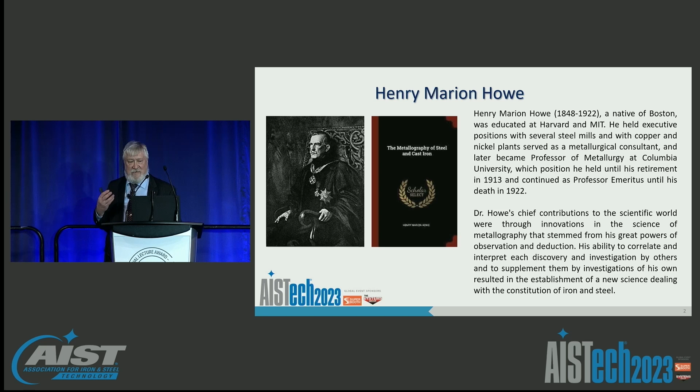Ron already highlighted some of the attributes of Henry Marion Howe, and I wanted to just emphasize those. One of the things that Henry Marion Howe did was actually take the art of metallurgy and transition it to a science. And he was very successful at doing that, publisher of one of the early metallographic texts in the industry. Overall, his impact over the years led to a large number of individuals who have continued that contribution.

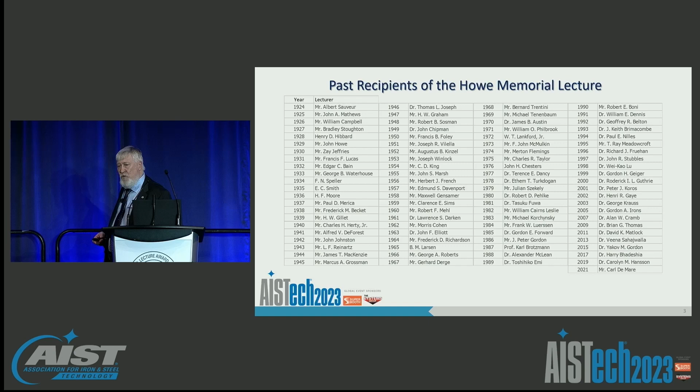Ron already showed a list, but I wanted to just put that list up here again. As I look through this list, there are so many people that I know from my time in the industry, so many people that I have great respect for that have helped me in my career. I just wanted to say thank you to all of them for laying the groundwork for the future of the steelmaking technology area.

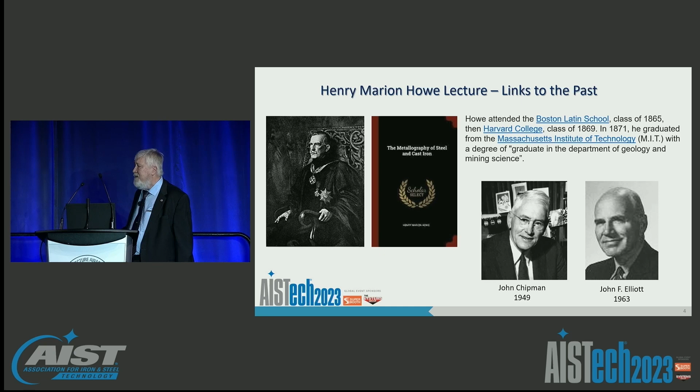I did want to highlight one area that I'm particularly proud of, and that is, as I look back at some of the past selections for the Howe Lecture, my advisor, John Elliott at MIT, was a previous speaker. And not only that, but his advisor before him was also a Howe Memorial Lecturer, and that's John Chipman. And as I go back and look further, Henry Marion Howe himself also was a graduate of MIT. So there's a long legacy for MIT's involvement in steelmaking, and I'm really proud to be here today to carry on that legacy.

So we're going to talk about fiber optics, but I want to basically first talk a little bit about Industry 4.0. You all know that Industry 4.0 refers to the fourth industrial revolution, which affects every manufacturing domain, not only steel, and advanced manufacturing technologies that capture, optimize, and deploy data. Boston Consulting Group identified 9 key areas that drive Industry 4.0 methodology: additive manufacturing, augmented reality, autonomous robots, big data analysis, cloud, cybersecurity, horizontal and vertical systems integration, Internet of Things, and simulation. All are components of this Industry 4.0 thrust.

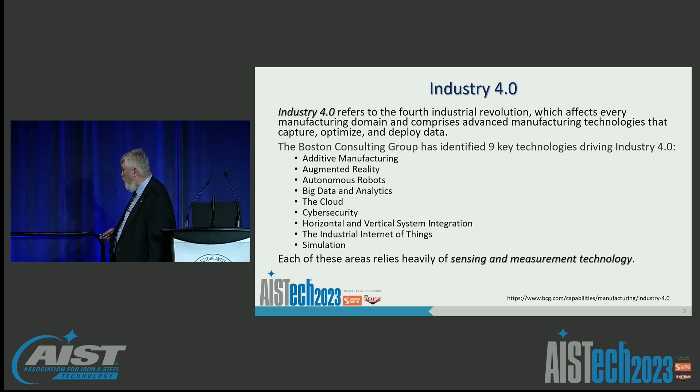One of the things that is important for all of these areas is that, for the steel industry, really all of these technologies rely on sensing and measurement technologies to actually enable Industry 4.0. And in particular, I'm really interested in it from the standpoint that we deal in an extreme environment. The temperatures and conditions within the steelmaking environment are tough environments to measure temperature, strain, position, composition, and so forth. However, the Industry 4.0 methodologies really require these inputs to support things like artificial intelligence, big data analytics, neural nets, Internet of Things, augmented reality, robotics, and digital twins. In order for these things to work, we need to be able to measure and verify these systems, and it's key to continue the push to develop new sensor technologies.

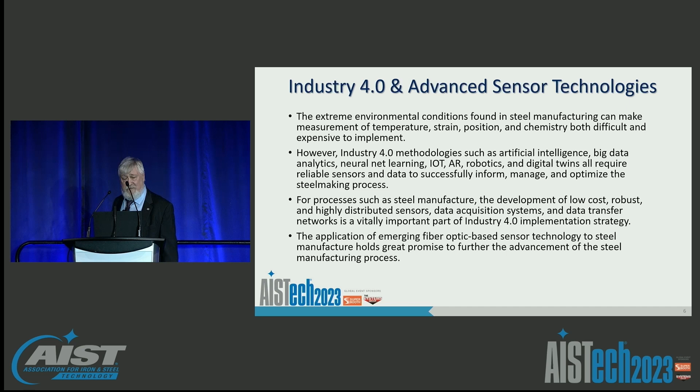From my standpoint, one of the big interesting areas in steel measurements is the application of emerging fiber optic sensor technologies. Steel manufacturing is a key area where we can apply some of these new technologies. So what are fiber optics? Simply put, they are light pipes. They actually transmit light energy through the core of a fiber with low attenuation so that you can actually send this signal from one location to another.

Those systems can also be configured to measure things like temperature, strain, and even chemistry. Those measurements are really important to our industry. Fiber optics actually provides a really interesting methodology to do these measurements in the hostile steelmaking environment.

Some of the advantages of these fiber optic systems are that they're small and lightweight, immune to electromagnetic interference, and resistant to chemical corrosion. They have, in many cases, high temperature capabilities and very high sensitivity. They provide the ability to do remote sensing with interrogation units away from the high temperature environment. And finally, they provide a unique opportunity to do distributed sensing, where many measurements can be made along one fiber.

Fiber optic sensors come in a whole variety of forms, and I want to highlight some of these fiber types and some of the sensing methods used in them. Fiber types typically consist of either single mode or multi-mode fiber.

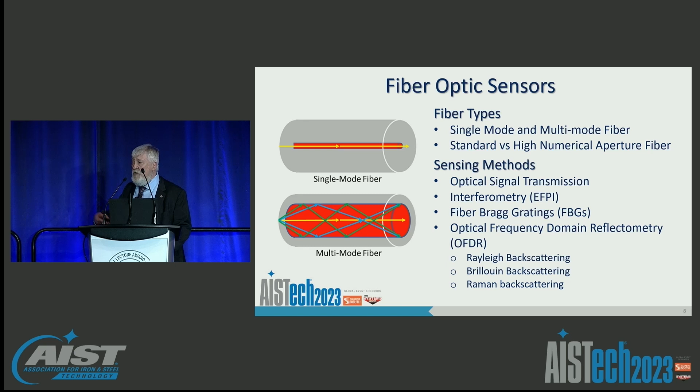There are various types of scattering that can be measured in the optical frequency domain: Rayleigh scattering, which has the highest resolution; Brillouin scattering, which has a lower resolution but much longer transmission length; and Raman, which is almost equivalent to Brillouin in terms of its extended lengths. I'm going to be talking more about all of these.

To start off, one of the simplest forms of sensors that can be manufactured with a fiber is an interferometer. An interferometer looks at reflected light off the end of the fiber and reflected light off of a target, collects those reflections, and monitors the behavior or distance between the target and the end of the fiber based on its interferometry signal.

Those two signals create an interference pattern. That interference pattern is directly related to the gap between the end of the fiber and the target, and the index of refraction of the medium in that region.

It turns out for things like temperature measurement or space measurement, these types of sensors can be used for very accurate position measurements, in many cases under conditions where they're exceptionally insensitive to temperature. I'll show you some examples of that later.

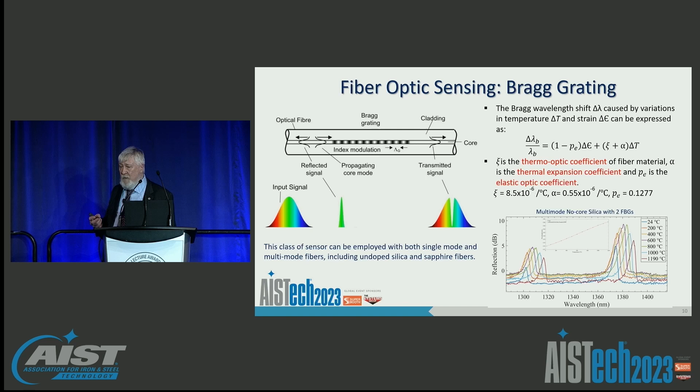When the conditions at that location on the fiber change, that pattern remains but shifts in its frequency. We can use cross-correlation methods to interrogate about a 0.5 millimeter space along the length of the fiber, and that leads to essentially a near continuous temperature measurement.

It turns out there are some really interesting ways to do that. You can either isolate the fiber from strain and measure temperature, or fully connect the fiber and measure a combination of temperature and strain. But we can also use different fiber numerical apertures in the same configuration and deconvolute the temperature and strain signals directly, by comparing signals of two different fibers with different numerical apertures. So a 2-fiber run can actually do a deconvoluted temperature and strain measurement, which is pretty exciting.

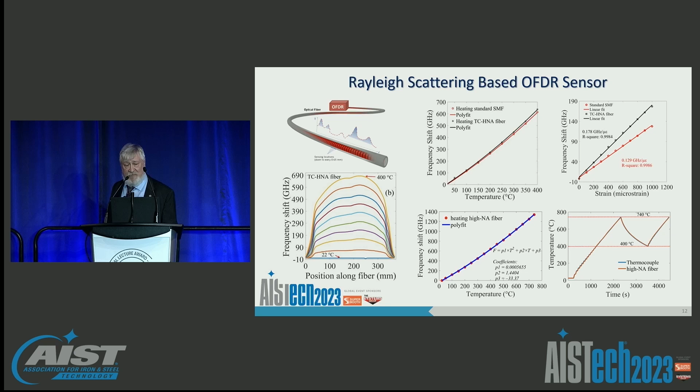If you look at the bottom right, there's a plot going up and down in temperature, with a thermocouple superimposed on it. You can get an idea of how accurately these things trace and predict the temperatures based on their frequency shift. But that comparison is a little deceiving, because you also get the information on the bottom left.

Which is the full temperature distribution along the length of the fiber. So running one fiber through your furnace or in an environment will actually give you the whole profile. And that's really exciting stuff.

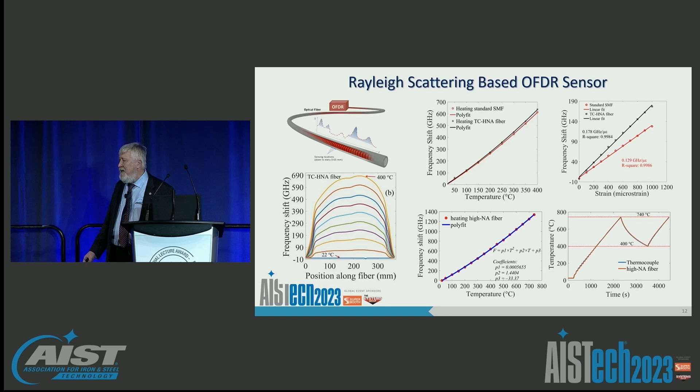There are a number of different methods I've already highlighted, and I wanted to summarize some of them here, because each has its own distinct advantages and disadvantages. If I look at fiber Bragg gratings, typically the maximum spatial resolution you can get out of those fiber systems with Bragg gratings etched on them is about 5 millimeters, which is great for a lot of applications and actually being used in continuous casting molds today.

They can sense, though, at very long distances, up to 10 kilometers in length. But their one restriction is that typically you're limited to the number of sensors you can put on the fiber, because each one has to have a distinct frequency. So typically we can have maybe up to 128.

Many systems that I see out there are limited to 50 or 60 sensors on a fiber. But with that, you can go over very long distances and do point temperature measurements. So it's kind of a quasi-distributed measurement system.

Temperature or strain can also be measured. The other thing about Bragg gratings is that they can be used not only in single mode, but also in multi-mode fibers, where the core is so thick that you have multiple light paths, and you can no longer use time of flight for position measurement. The frequency defines the position based on the frequency you set along the fiber.

These fibers can actually reach temperatures up to 1800 C if you use certain fiber types, like single crystal sapphire fibers, which can now be grown in up to 2-meter lengths. So I'll show you some examples of that as well.

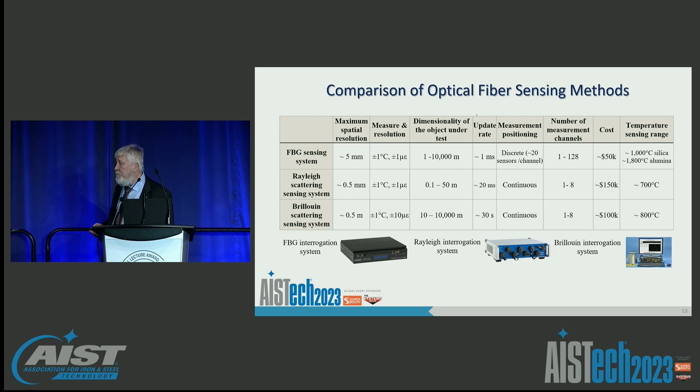So I want to now just talk a little bit about how we use some of these fibers. And today, some of these fiber systems are already being introduced into the industry for a lot of uses.

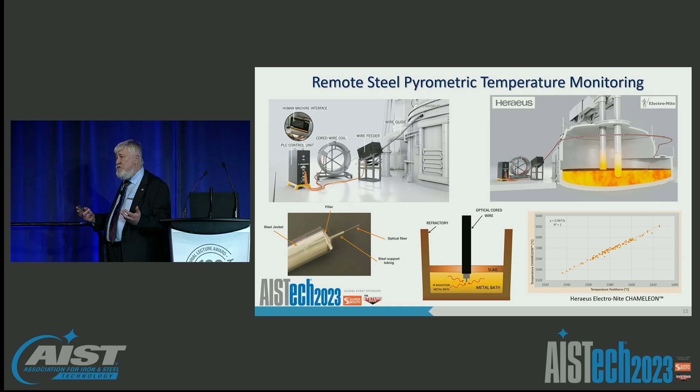Just to give you a few examples, here's a system called the Chameleon system by Heraeus Electro-Nite. It is actually a consumable fiber that is injected into the steelmaking environment, the EAF or LMF environment. The fiber is consumable, it's protected and jacketed, and it actually measures the thermal emission and carries it back through the fiber to measure, essentially through an optical pyrometry method, the temperature at the tip of the fiber being introduced and ultimately consumed. The beauty of this method is that the tip of that fiber actually acts as a black body radiator, and so emissivity corrections aren't required, so you can get a very accurate temperature measurement.

There are some other advantages of this system: because the fiber is being introduced and consumed, we can also do things like track interfaces, such as slag and metal bath heights in these systems. And we're working actually with Heraeus on some other ideas to incorporate composition measurement in these kinds of systems as well.

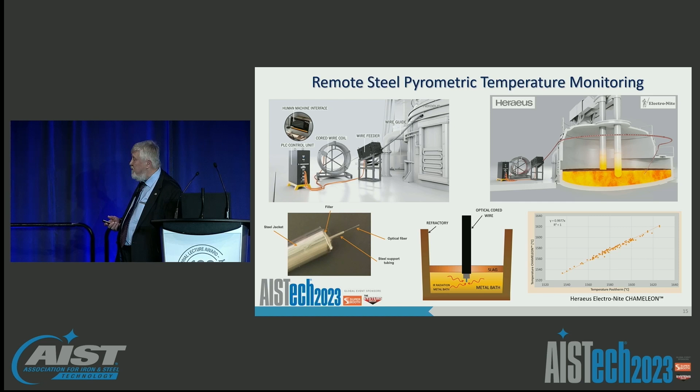There are a number of people that are marketing sensor systems to go into the refractory linings of your steelmaking vessels. There's a couple of them that are out there that have largely settled on the use of either Brillouin or Raman backscattering, which, as you remember, is relatively low resolution, about a half a meter measurement length accuracy.

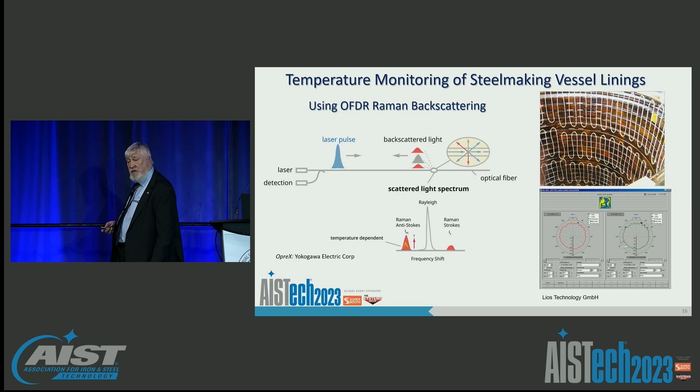One of the biggest areas we're seeing an influx of fiber optics is in the continuous casting process for measurements of mold thermal behavior. The standard right now for these technologies are based generally on fiber optic sensing methods using Bragg gratings. These Bragg grating methods, as I mentioned, can measure resolutions down to about 5 millimeters and can map the thermal behavior in a mold over a wide area.

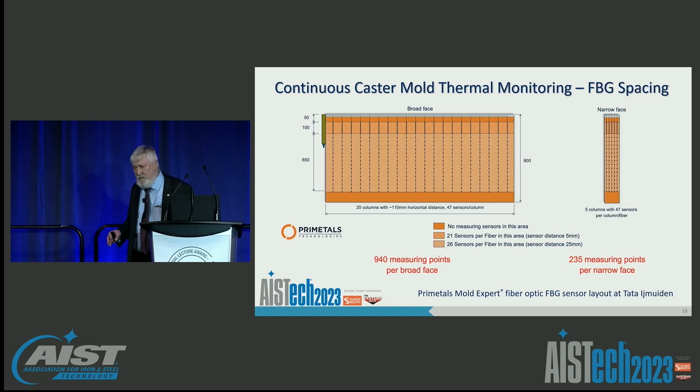There are others out there, and this happens to be one of the higher resolution ones I've seen. Here, each shaded area is an individual fiber, and each fiber has between 21 and 26 sensors etched on it. They've mapped a much higher density around the mold meniscus area, and the advantage of doing that is we can now thermally trace the meniscus and the meniscus shape. Here are some examples of that.

Here we can actually see standing waves, flow asymmetries, sticker events for sticker detection, and you can track and monitor that wave shape in real time. One of the things we always worry about in the casting process, to make quality steel, is we have to minimize the wave asymmetry and turbulence in the mold. So this is a really valuable tool to tell what your mold profile is looking like.

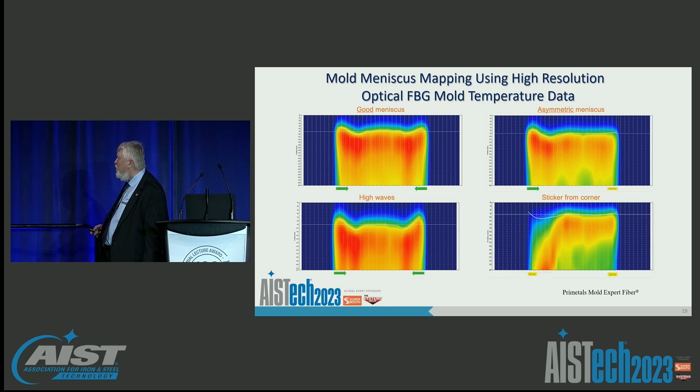Before this, the way we used to measure these systems is we would put nail boards or shims in the mold and do a spot test, right? But now with these systems, it's becoming increasingly more valuable to actually see these things dynamically.

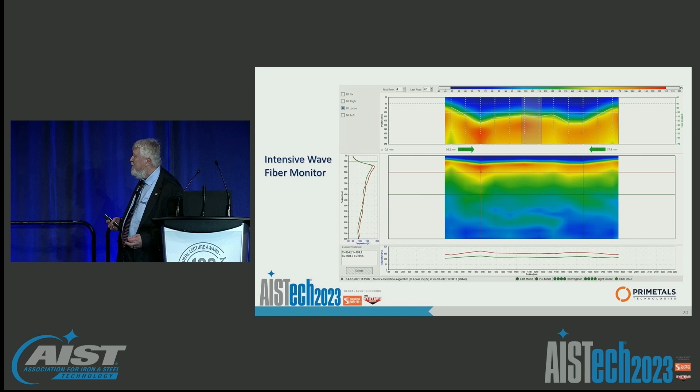Here's an example of some dynamics in the casting process. You can see how that meniscus behavior is fluctuating, and you can see the thermal profile lower in the mold down below as well. There are some things about the lower region of the mold we'll talk about in a minute. But all in all, these are great tools for studying the stability of flow in certain submerged entry nozzle designs, the efficient use of electromagnetic braking, and also the development of mold fluxes.

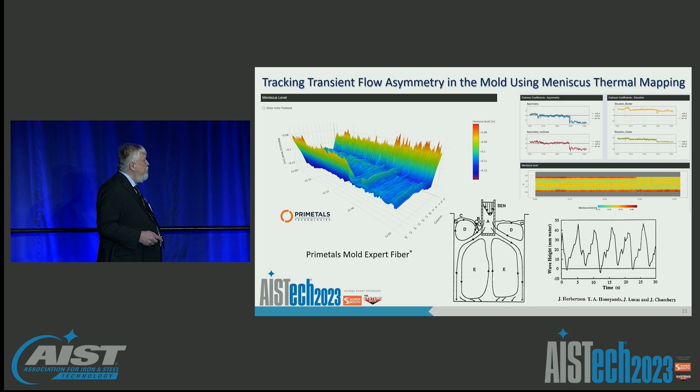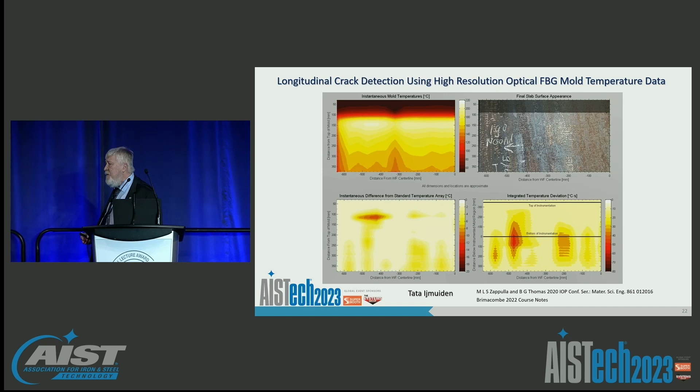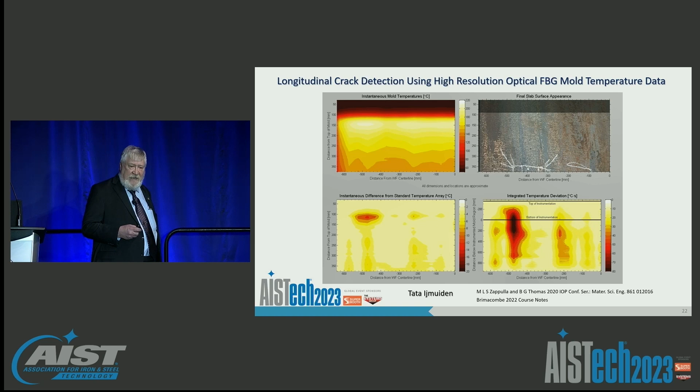This is actually a slide that Brian Thomas put together, and it shows how these fiber optic mapping systems can be modified and interrogated to identify high-risk regions for longitudinal cracking, for example. Up to this point, conventional breakout systems did not have the resolution to do this type of measurement and sensing well. But these new high-density fiber optic systems are very good at detecting these asymmetries and anomalies. And given that these longitudinal cracks can have very narrow spatial width, it requires high-density measurements in order to identify them.

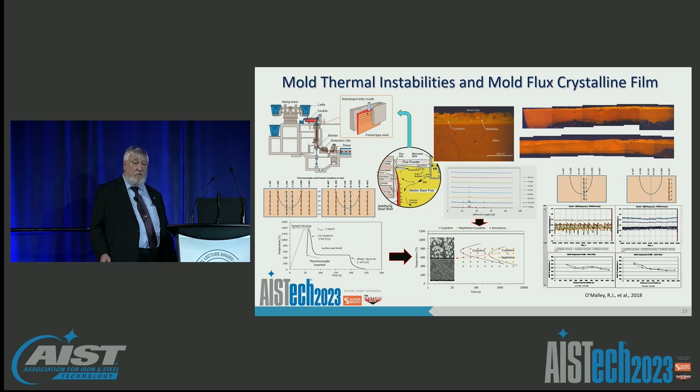And this occurs repeatedly over time. With these types of systems, we were still very lucky to catch this, because even in this densely instrumented mold, we were lucky to catch that type of behavior in the funnel root area. With conventional sensors, breakout detection systems, or mold heat removal measurements, you would never see this behavior. It's hidden because it's in a small area relative to the total heat removal of the process. But it is very disruptive, and it's one of the reasons these types of mold designs sometimes exhibit centerline longitudinal defects. The key to solving that problem is developing flux films that remain stable under the stresses of the withdrawal environment of the casting process.

With these new fiber optic systems, we can see these behaviors directly. You can see here on the left versus the right, different fluxes in different steel environments that show essentially jumping behavior as a function of time lower in the mold, directly related to this film sheeting behavior. If that sheeting behavior travels too far up close to the meniscus, we have catastrophic events take place.

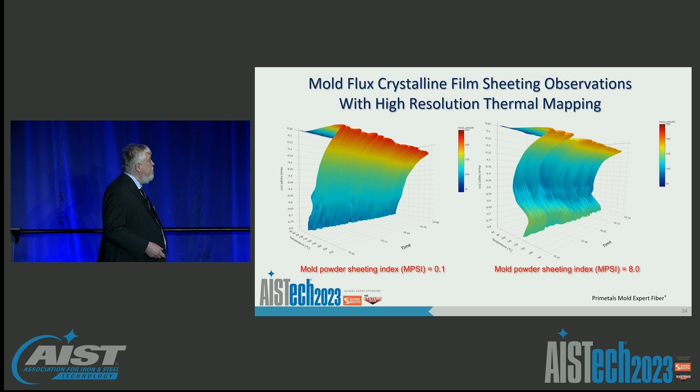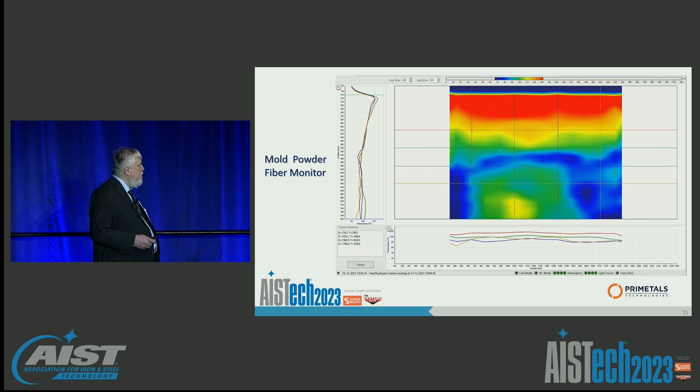This is actually a video showing the dynamics of a lower part of a mold that exhibits this periodic sheeting behavior. You can see it's not always uniform. This happens to be sheeting in the lower part of the mold, but we can actually watch that instability. A lot of this has to do with how the flux is designed, how thick and rigid the flux film is, and its ability to resist shear in essentially the stresses associated with the casting process.

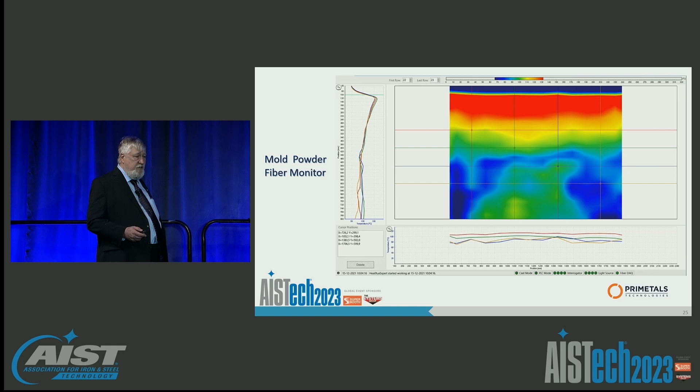Of course, the holy grail is to actually use a system like this and close the loop. Here is a proposal for a process that is being offered, but I don't know that it's being widely used at this point, that closes the loop between an electromagnetic brake system, the ABB FC mold system, and their monitoring system so that the magnetic field can be adjusted dynamically to control the stability of the meniscus and stability of the process.

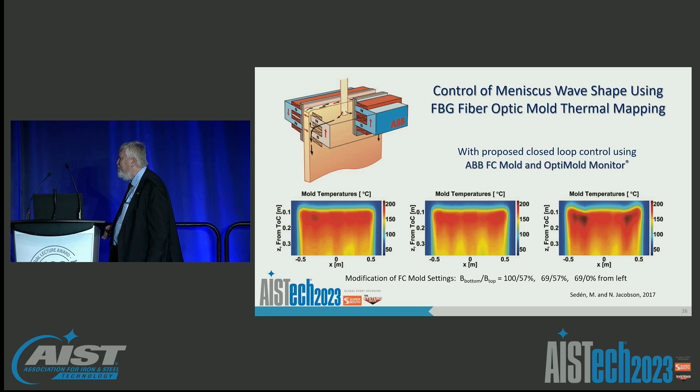Okay, well, everything I've shown you so far are things that are already available, right? They're out there, and they're available for people to use. I want to talk a little bit now about some of these more interesting and newer technologies, because in the end, I think there's room to move forward quite a bit.

One of the first ones I wanted to mention was the use of thermal mapping using Rayleigh scattering. These fiber optic systems can do very high resolution measurement on the order of 0.5 millimeter. They require no special manufacturing to put sensors within the fiber like a Bragg grating system does. As a result, we can utilize off-the-shelf telecommunications fiber as a sensing device. So it's not only low cost, but now we can use a single fiber, and with the right numerical aperture, can bend it at tight enough radiuses that we can weave it back and forth in the mold.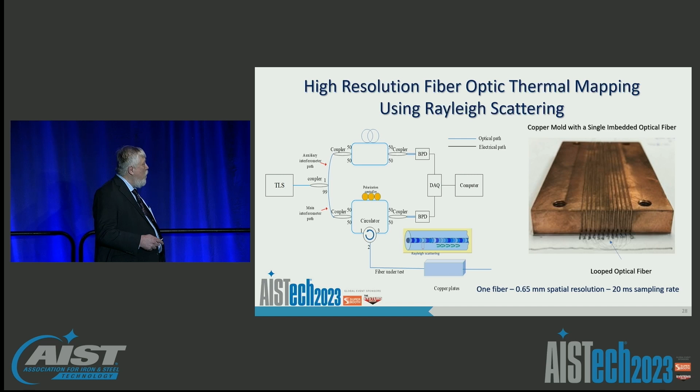And under those conditions, create a very high resolution thermal map of a process. This is an experiment we've done in our labs that shows a mold where the fiber has been woven back and forth within this mold plate. Then we put it into a system where we immerse it in molten steel to do a heat transfer measurement and actually extract the shell growth and measure that shell growth. We've used this largely in our labs to study peritectic behavior. Peritectic shift is a function of chemistry.

Just to show you what this looks like, there's our plunging device with the instrumented single fiber, and that's the raw fiber signal. So if I back up, you can see that single fiber actually can give us one continuous profile of temperature that then can be remapped into a thermal map.

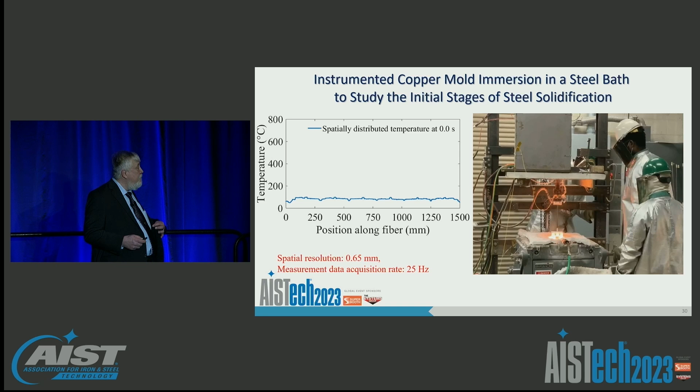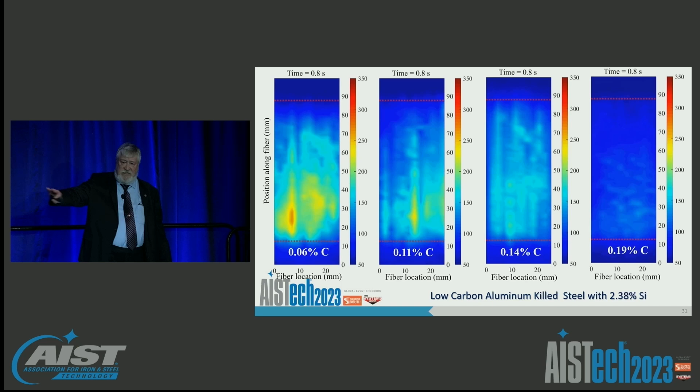And these are some examples of thermal maps. This happens to be a steel with carbon at various levels in it, but with silicon, which actually extends the peritectic to the higher carbon range because of the nature of the silicon providing essentially ferrite stability. As a result, we can watch from these thermal profiles the impact of shell pull away on the heat extraction very clearly. Normally we would have the peritectic running between about 11 and 14 carbon, or 16 carbon. Here you can see because of the silicon, it's pushed up to the higher carbon levels.

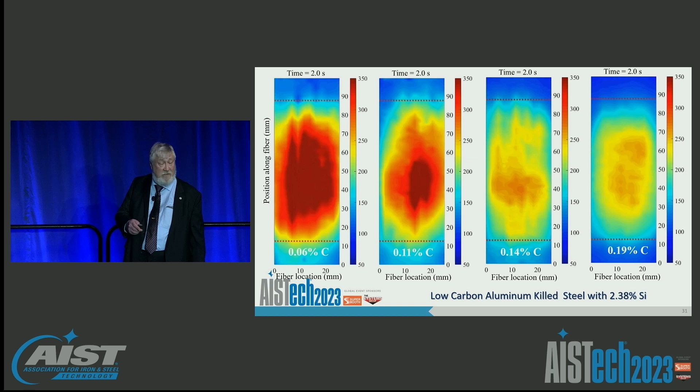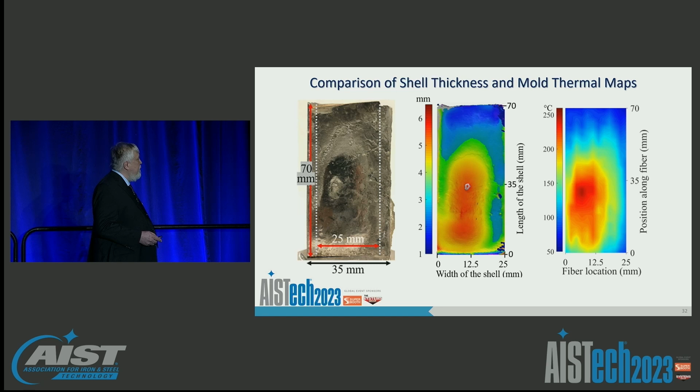Just to give you an idea of the resolution of these systems, there's a shell profile and a thickness profile that corresponds very well with the thermal mapping profile. We're actually able to get very high detailed information in this type of sensing environment.

These fibers are good up to about 700 C, and in this environment we can use them in other processes as well. This is actually an aluminum casting. Given that the fiber has temperature measurement capabilities of about 700 C, this is a really good test to show what the single fiber is capable of in a solidification environment.

We've put a fiber across the mold cavity and measured the thermal arrest associated with solidification, in this case for relatively pure aluminum. You can see the arrest shows pretty good uniformity right where it's supposed to be, about 660. The nice thing is on the lower right you can actually see the variations in the local solidification time, all extracted with a single fiber.

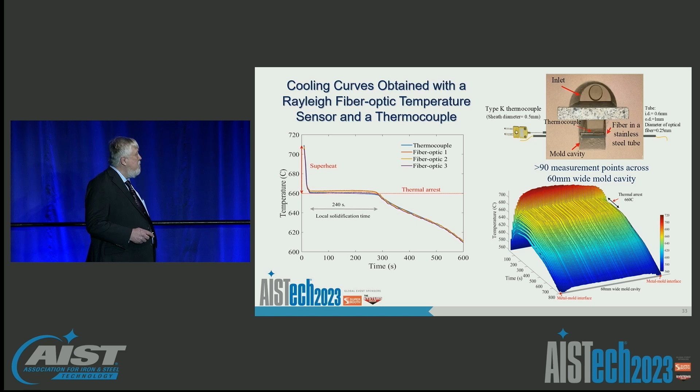We're also putting these in linings. One of the downsides of using Raman scattering systems is you've got very low resolution. But if we put these Rayleigh fibers in that environment, we can get very high resolution profiles in refractory lining systems as well.

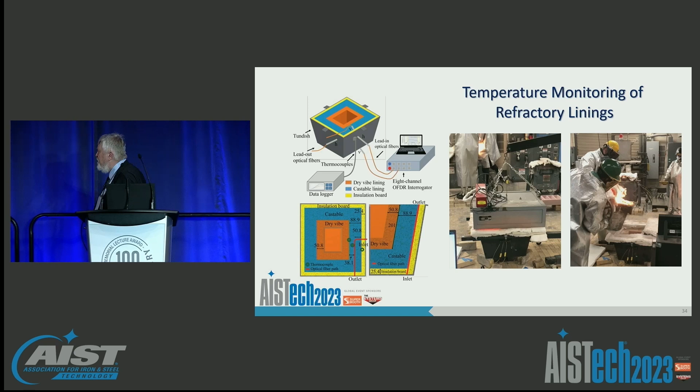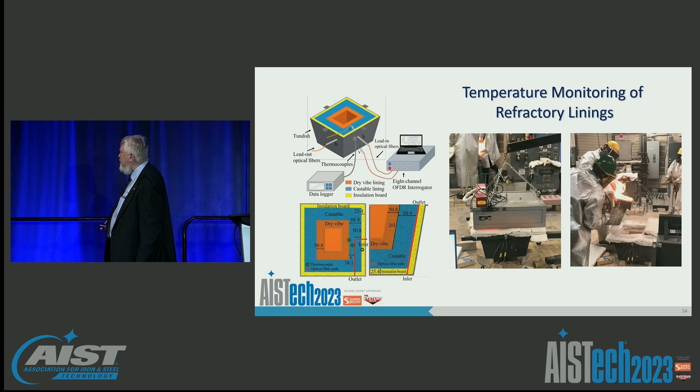This is some of our laboratory experiments in a mock tundish where we've put a fiber in, and I'll show it poured. We exposed it to an environment simulating essentially a dry vibratable tundish lining system. We take that fiber path through the permanent lining, and we can replay the thermal profile going through that permanent lining and passing through the insulating linings. Once again, one fiber giving you a whole profile of information.

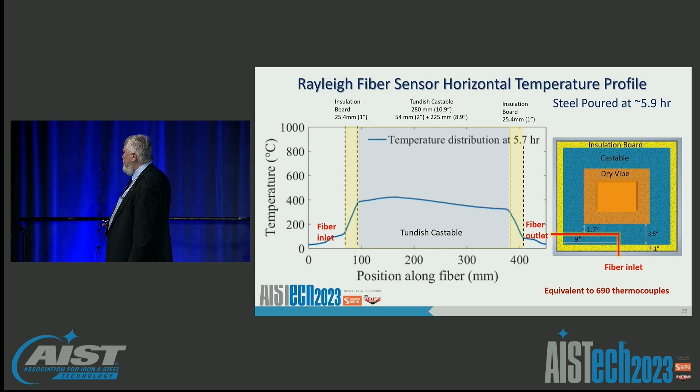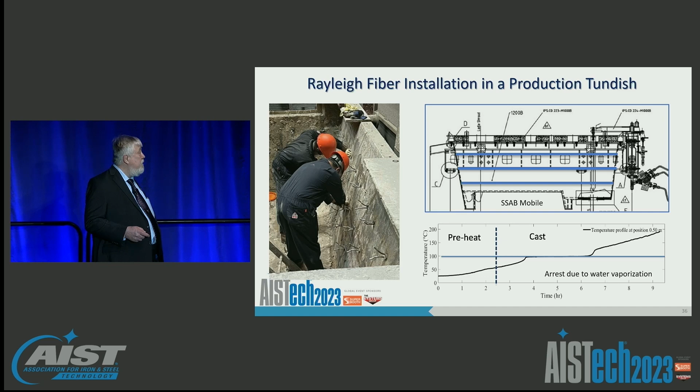I mentioned that we did some measurements in aluminum, but if you're like me, you want to do it in steel, right? So how do we do that? One way is we move to a different fiber, in this case single crystal sapphire fiber, which can be grown now to about 2 meters in length, about 125 microns in diameter.

That diameter is too wide for it to serve as a single mode fiber, so it's a multi-mode reflector, and we have to do special things. We have to embed sensors, so we use a femtosecond laser to put the lines in to create the Bragg gratings. We also use special mode scrambling technology to highlight the key signals we're most interested in. With that technology, we've been able to demonstrate ability to measure temperatures well in excess of 1600 C that you would see in most steelmaking environments.

In fact, pushing 1850 C. The lower right shows a correspondence of the temperature measured by a Bragg grating with one from a type B thermocouple, just to show that these things track each other very well. This is actually doing a great job tracking the temperature changes in a system. On the left you see the raw signals that show for 2 Bragg gratings, the peak shift as a function of temperature. That's what we're actually tracking to measure the temperature. We monitor where these peaks shift to and then correlate that frequency shift directly to temperature.

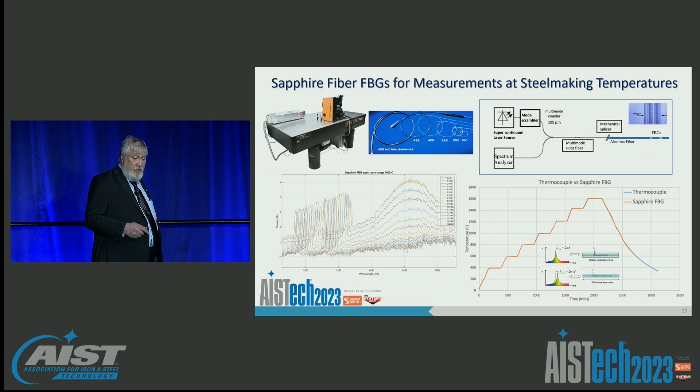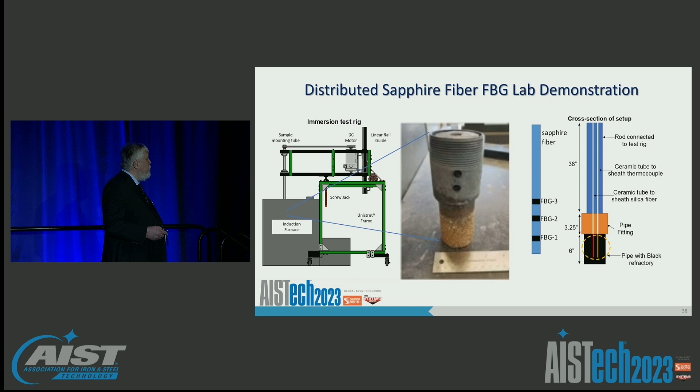We've taken these fibers and put them in commercial alumina carbon and zirconia carbon refractory systems because our interest is embedding these directly in the steelmaking process. We've demonstrated that we can do measurements quite well with these fiber systems in conventional refractory environments. This shows a sapphire fiber system with 3 Bragg gratings that measure the temperature along the length of immersion of a probe, and the middle one is compared to a thermocouple. You can see again the relatively good correspondence of the temperature with the thermocouple position, but we have the added benefit of having multiple measurement points along the length of the fiber, so we can measure gradients along that environment.

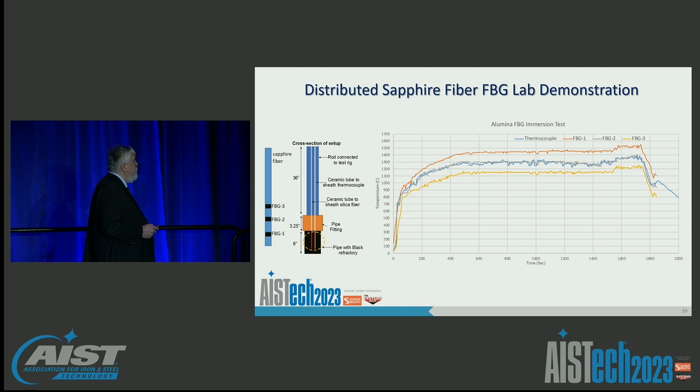Distributed temperature measurement is an important one, and we've demonstrated that these fibers can look at a larger number of sensors than 3. In fact, we've now demonstrated up to 10 FBGs in a fiber, in a sapphire fiber system. Each peak frequency will shift as a function of temperature, and each can be tracked to have an individual measurement point along the length of that fiber.

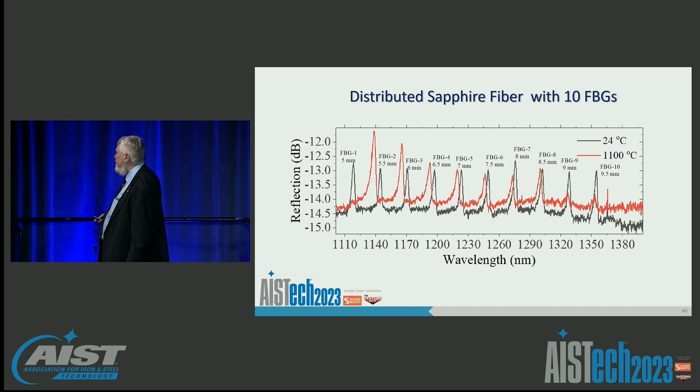Our holy grail is actually to demonstrate these in a commercial refractory. We've had some trial nozzles made that will be put into a commercial test in the next month or two, where the fiber is embedded into the sidewall of a submerged entry nozzle. We can measure the temperature gradients along the length of the SEN for things like wave measurement, submergence depth monitoring, and so forth.

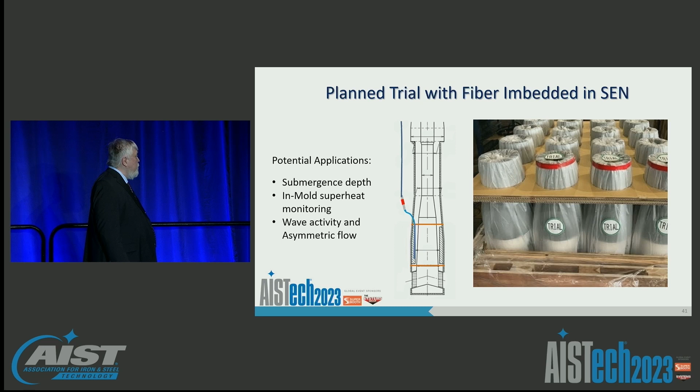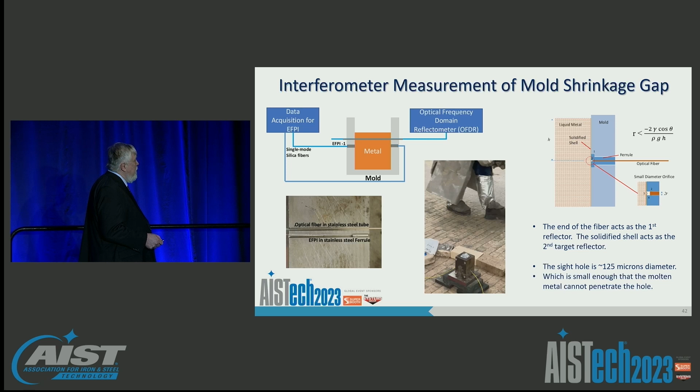This shows the interferometer setup and here are some of the results. If we combine it with Rayleigh backscattering fiber temperature monitoring, we have all the information we need to monitor the thermal profile through the mold wall, through the solidification cavity, but also directly measure the evolution of the gap, which is a very difficult measurement to do. I know some people in the audience have done it with LVDTs or Temposonics. It's very difficult because you have to compensate for temperature changes along the connecting points. Here, this interference pattern is temperature insensitive, so it's a pretty benign sensor and gives you a lot of really valuable information.

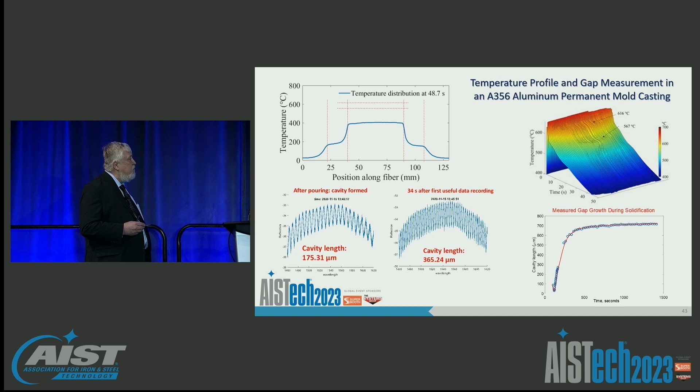So am I going too deep, guys? No? Okay.

So here are some measures. The other thing we're thinking for these interferometers is that they potentially have a lot of value for doing measurements in the caster in the future. Not only can we monitor slab shape and other things directly exiting the mold, but we also potentially can use these for measuring things that Brian would be really interested in, such as interroll bulging behavior. These sensors, because of their temperature insensitivity, could be a really good candidate for this.

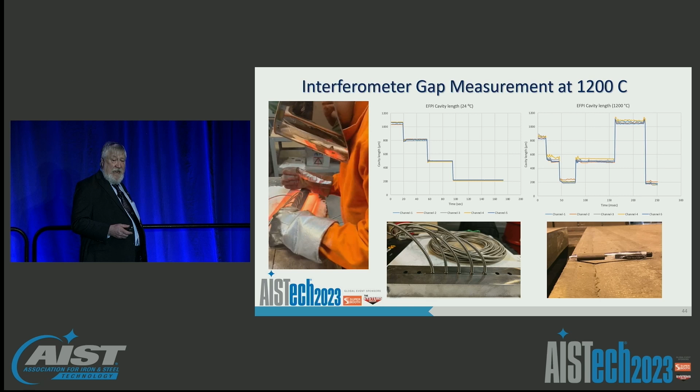The other thing we're exploring is this high temperature calibration, showing the measurement of a calibration block at 1200°C versus room temperature, just showing that we get the same measurements regardless of the environment temperature.

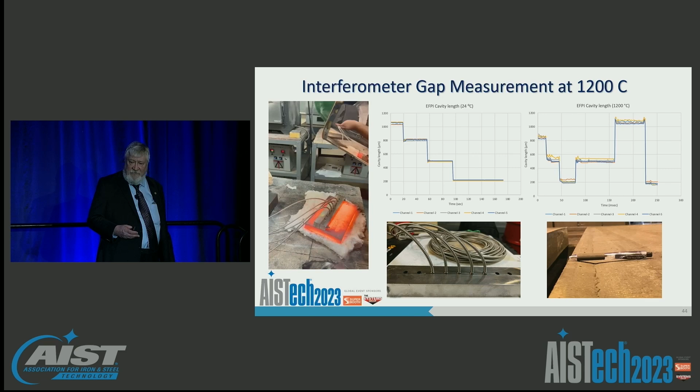It's actually pretty exciting. One thing we're looking at right now is, can we put one of these in a mold and get information about the flux and flux crystallization directly? If we use these interferometers, the reflection off of reflecting surfaces can give us a lot of information: what's the interfacial gap between the surface of the flux layer and the mold, is there a presence of a crystalline layer and where is it forming, and potentially even reflections related to the flux contact with the shell surface itself. We can monitor all three of those with a single interferometer by taking the interference patterns and, in the frequency domain, identifying the key peaks related to that interferometry pattern.

So we've been able to detect things like flux crystallization. This is a small, essentially cell experiment that we've done that demonstrated we can see these things. Actually, I think it's showing there.

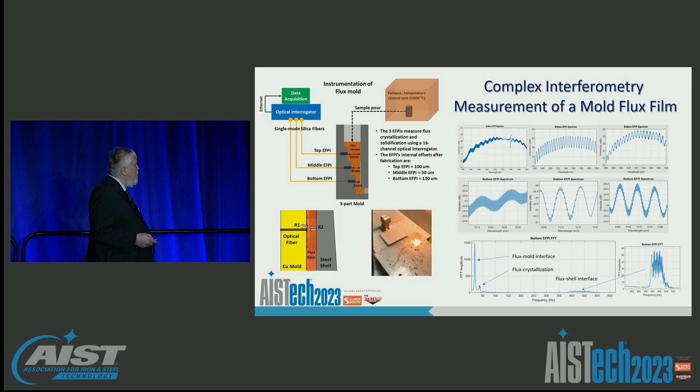Okay, so everything we've talked about so far has been either position or temperature. How are we doing for time?

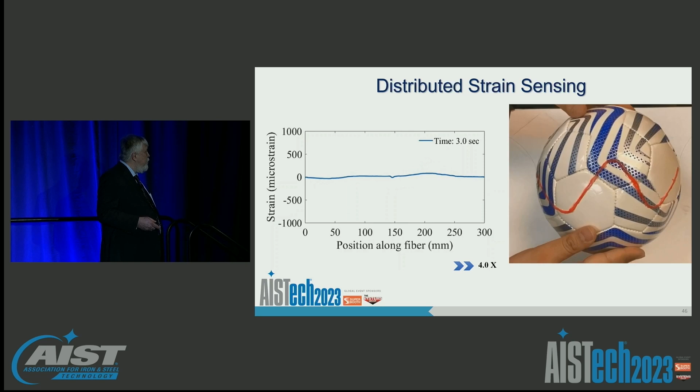We're good, okay. I also wanted to mention that these fibers can measure strain. This is just a demo that our guys like to show, basically showing how a fiber attached to a surface can be used to directly measure dynamic strain in real time. It's actually pretty impressive that this can be done.

We've also taken fiber optic sensors and applied them in the real world, putting them on continuous casting support beam structures to do essentially roll force measurements to detect the presence and absence of liquid core position.

The beauty of using fiber optics over conventional sensors in this environment is that these sensors can be multiplexed. They can be daisy-chained, so we can have one fiber feeding a large number of sensors and instrument a whole segment or bank of segments with one fiber, as opposed to running power to do strain gauge measurements at each location. So it's pretty trivial to put on.

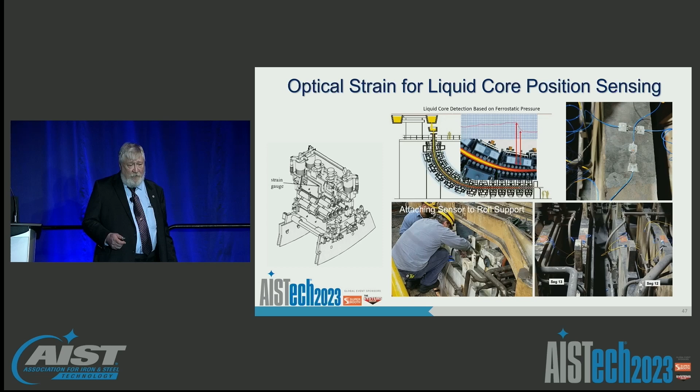In fact, these particular sensors were glued on the surface after cleaning with acrylate cement, and they actually produced very nice signals.

We've been able to demonstrate this on a continuous caster, using their internal digital twin model of the liquid core position, and compare the strain measurements, actually showing exceptional correspondence. In a couple of cases, we see operating conditions that cause a deviation from their model prediction, largely because of changes in mold heat removal that aren't accounted for in the model.

So these are going to be great tools if you're running a continuous caster and you need to know where your liquid core is, either for productivity or if you're doing soft reduction to improve center line. These are really great tools that can be used, and they're relatively easy to install.

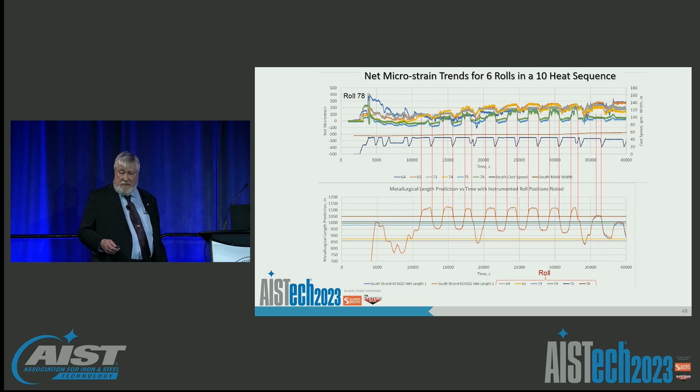The other thing about these fibers is that they're pretty sensitive. We can see what looks like noise in some of these fibers, and you'll notice we have two signals.

In this case, we used FBGs mounted longitudinally and transverse, such that when the roll force imparts deflection to the beam, we see a positive increase in the longitudinal direction, but a negative due to Poisson's ratio of the beam. So it's really easy to separate temperature and strain doing that.

But the signal and noise on that individual signal can also be separated out. In the frequency domain, we've been able to show that you can actually see bulging and bent roll conditions in the machine using this sensor technology.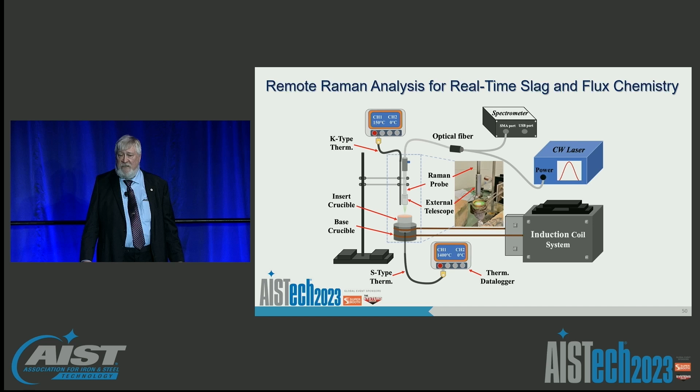Our first study on this was actually to look at mold fluxes and determine whether we can develop a probe that might be able to detect the shift in composition for some of the exotic steel grades we're trying to make, such as Generation 3 advanced high-strength steels, which have exchange reactions that cause pretty tremendous shifts in the composition of the flux. So this is what that probe looks like, and one of the small test conditions we use in the lab to at least extract the Raman spectra and begin to understand it.

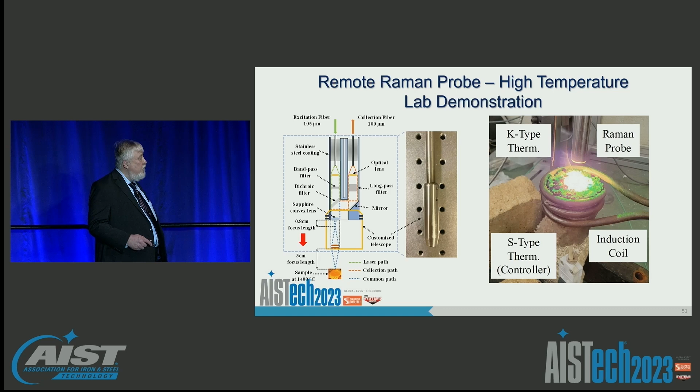What we've been able to show is that we can not only collect that Raman spectra, but we can look at key regions of that spectra and correlate it directly to the slag structures. Turns out for silicate slag systems and flux systems, the so-called Q region, which represents the polymerization state of silicate chains in the slag, can actually be detected by their Raman signature. Each one has a unique frequency.

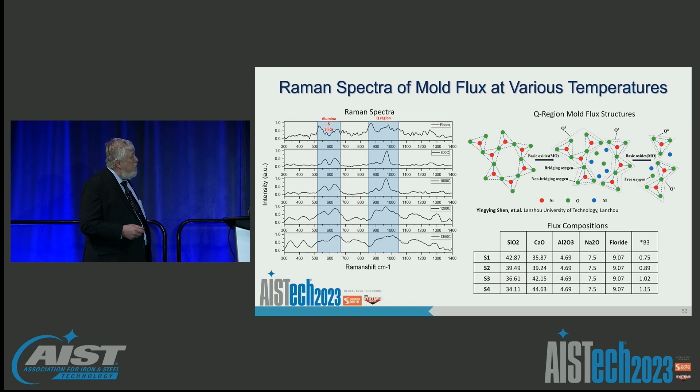We can take the Raman spectra and deconvolute that spectra in order to extract the fundamental components. Those fundamental components can actually be used to not only calculate the composition of the flux, but also to estimate viscosity of the flux, because it's the polymeric state of the slag systems that actually correlates to the flux viscosity. So we've been able to correlate a lot of these things, and this is work we've done on the spectra deconvolution in the flux systems.

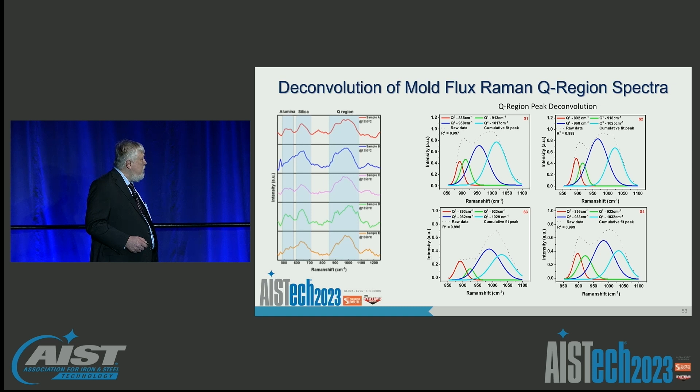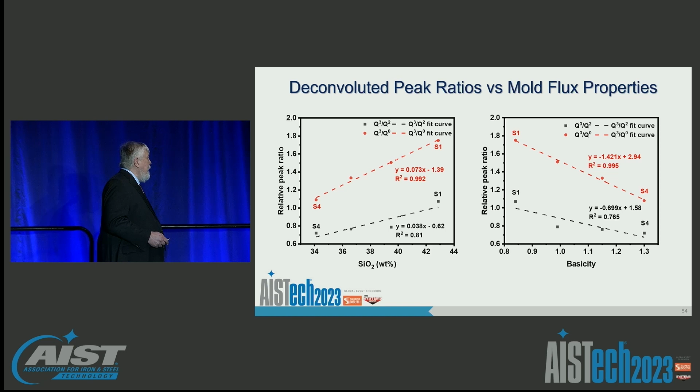And we're also now correlating those compositions and basicities of these fluxes to the structure, based on the ratios of the Raman spectra peaks that are deconvoluted.

We're also doing this not only for flux systems, but we're developing the same technology now for monitoring electric furnace slags, which is very exciting because the ability to do real-time slag analysis would be a real boon to the EAF industry.

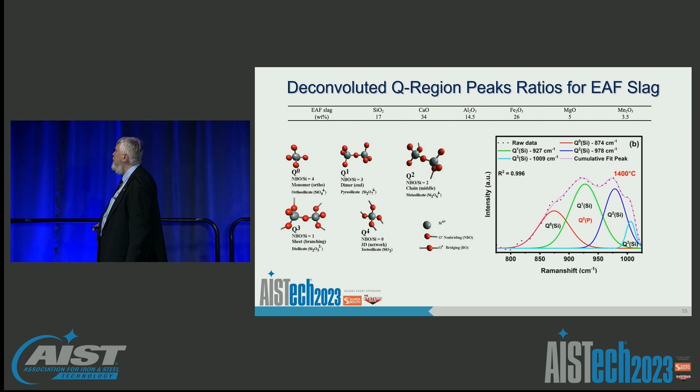So I'm reaching about the end here, and we'll have some time for questions.

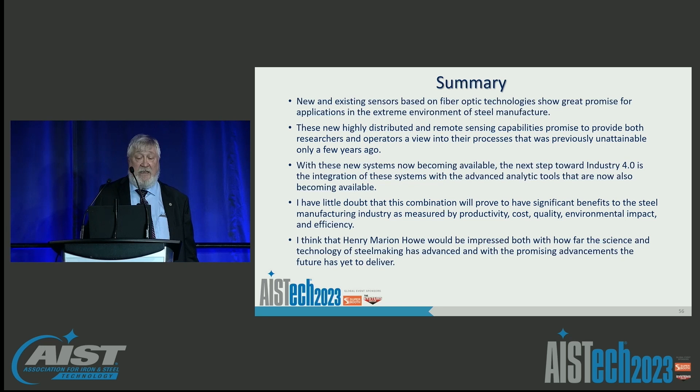In summary, new and existing sensor systems based on fiber optics show great promise for applications in the extreme environments of steel. These highly distributed and remote sensing capabilities promise to provide both researchers and operators with a view into their processes that was previously unattainable. One of our past recipients was Keith Brimacombe, and Keith always had a dream of having the intelligent or smart mold. This is now becoming a reality.

I think these sensor systems are providing us with all sorts of new measurements that can be used to move forward with Industry 4.0. These systems really support that movement, and I have little doubt that this combination will provide significant benefits to the industry, measured by productivity improvements, cost reductions, quality improvements, environmental impact, and overall efficiency.

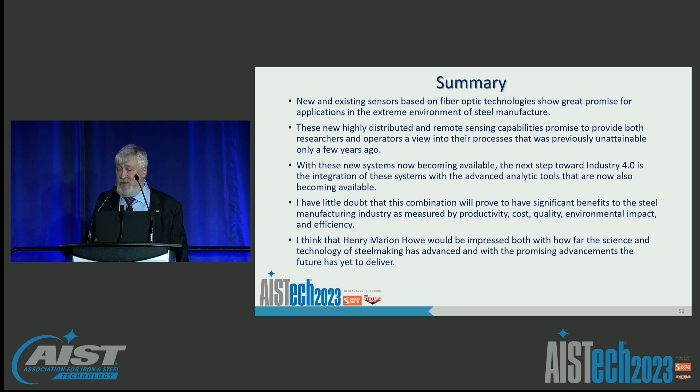In closing, I think Henry Marion Howe would be really impressed with how far the science has come and the technology of steelmaking has advanced, and would also be impressed with the promising advancements yet to come. And so with that, I'd like to say thank you and acknowledge some of my core team.

This was a large effort by a large number of people, including funding through government agencies, the Defense Logistics Agency, and our own Steel Center. I just want to say thank you for all of you who have supported this work. And we have the government disclaimer at the end.

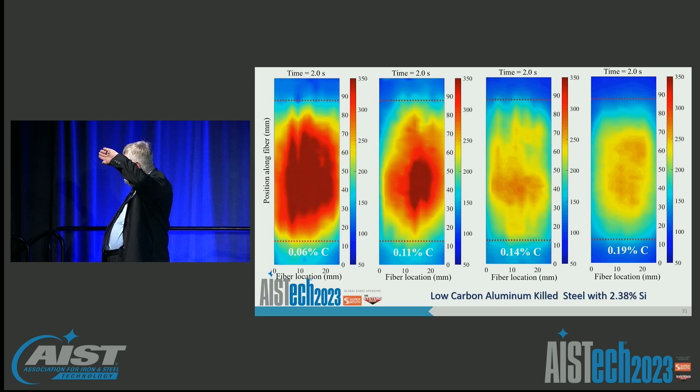Because the impression I got is that the thing that is special for peritectic steel grades is it looks like it's not so uniform. Well, there are two things in the peritectic - one is non-uniformity and pull away. And we can see the effect on heat extraction here. Right now we're not seeing a lot of the details, probably because of the size of our test, so you're not seeing all the shrinkage details. But is the conclusion that the non-uniformities in the formation of bulging shell in peritectic steel grades is because of a non-uniformity in heat flow? No, I think it's directly related to the nature of the peritectic solidification. In fact, most people would say it's the abrupt density change from delta ferrite to austenite that induces strains that cannot be withstood by the shell and creates that buckling.

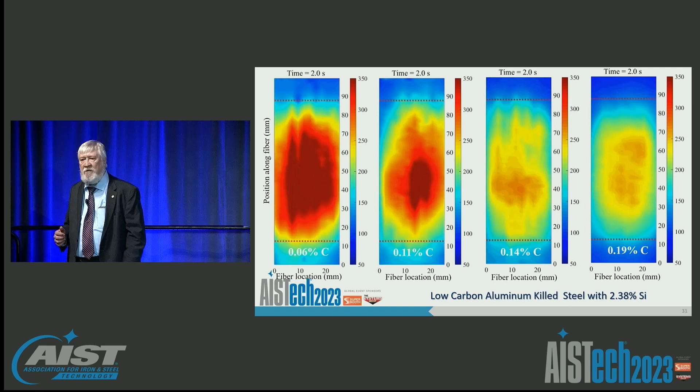Thank you, Professor. Fantastic presentation, this is Somnath here. I was most fascinated by the last part when you talked about the slag characteristics. Just a small question - when you take the optic fiber probe very close to the melt surface, do you need any particular filtering or shielding? And if you use any filtering against the radiation, does it interfere with the fidelity of the signal that you carry?

So one of the things we do in that environment is, first of all, we harden the probe so it can withstand reasonable temperatures. We're never going to have a probe that directly survives steelmaking temperatures, but if we can get close proximity and use an immersion tip to isolate the environment, we can actually avoid some of the incoming reflections from the surrounding environment. One of the things we do in these tests is take a background signal and then subtract it from the Raman spectra, and that helps us identify the key peaks. Does that make sense?

Any additional questions? Yes, Rod - very, very good talk, terrific. Thank you. Question - you said of Heraeus Electro-Nite...